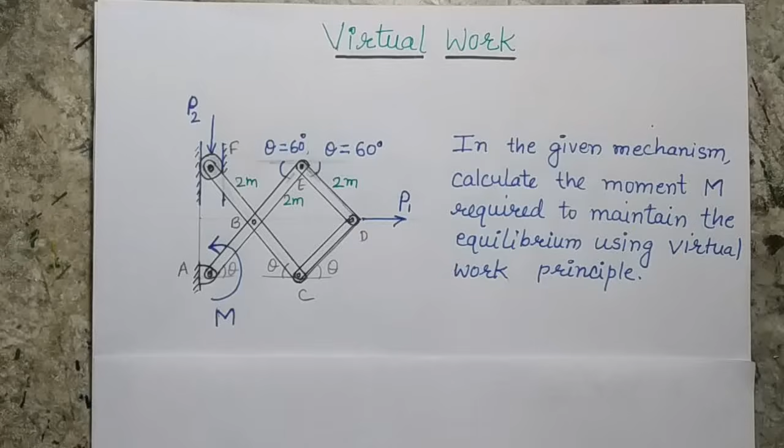This is a problem of virtual work. The problem states that we have to find the value of M for this system, which is in static equilibrium, using the principle of virtual work.

So let's first see the problem. I can identify there are three forces: force P1, force P2, and a moment M which is acting at point A.

I can identify that joint A is a pin joint, however joint F is a roller joint, and all the other points like B, E, D and C are pin joints. In the given condition, the system is in static equilibrium where the angles are 60 degrees and the length of each segment is 2 meters. We have been asked to find the value of M for this system.

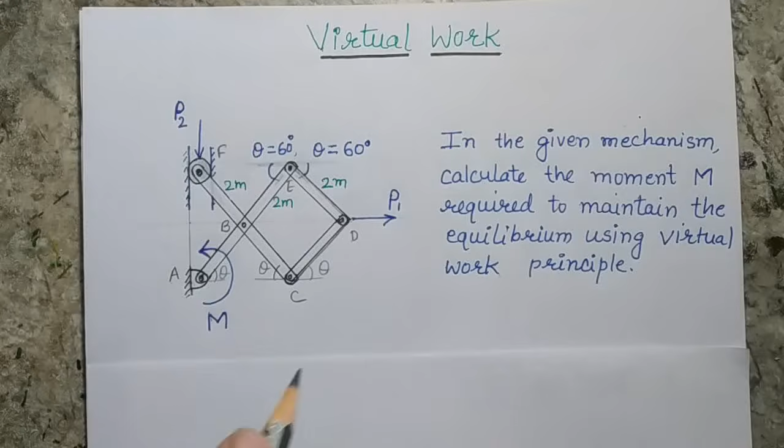However, force values P1 and P2 are also not given. That means we have to find the value of M in terms of these two variables.

Now we know that in the principle of virtual work, we have to displace our system virtually. After the displacement, we should find the displacement of each point where forces are acting, and then write the equation for virtual work. So now let's solve this problem.

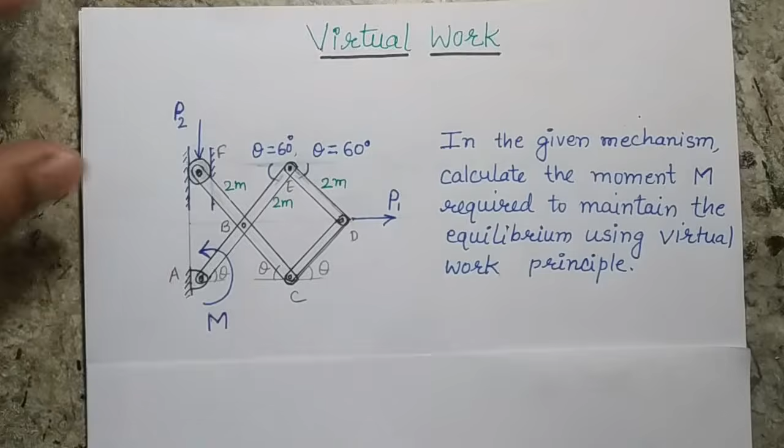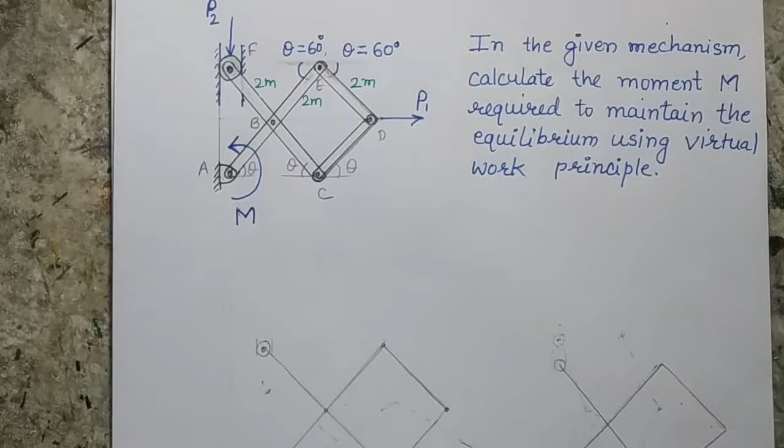My first job would be to give a virtual displacement to our system, and the question arises: what sort of virtual displacement?

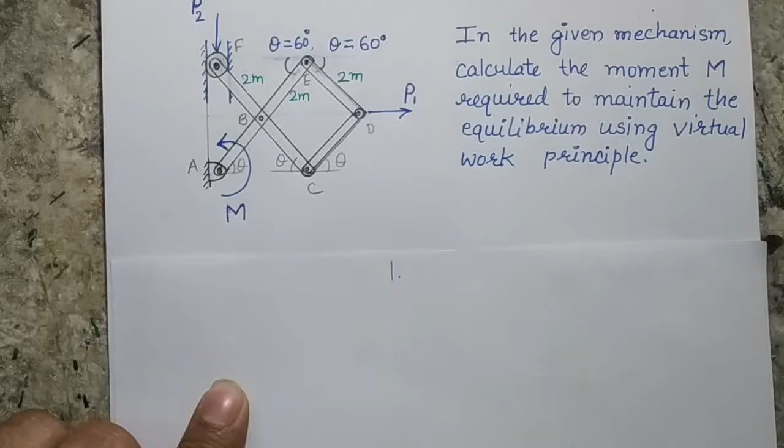Before I solve the problem, let me explain the first condition when we see a problem of virtual work: how your system will move when you give displacement to any section or point of your given mechanism or system.

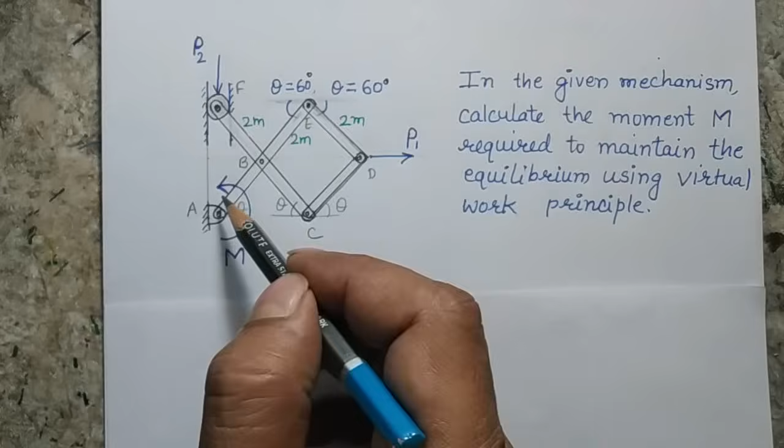For example, in this case, if I give a rotation to this bar A, B and E, maybe in the clockwise direction or counterclockwise direction, I can understand that when there is a rotation to this bar, the other points will get a different position.

However, the position of all the other points can be calculated if I know the rotation of this bar. That means all the motions are connected to each other.

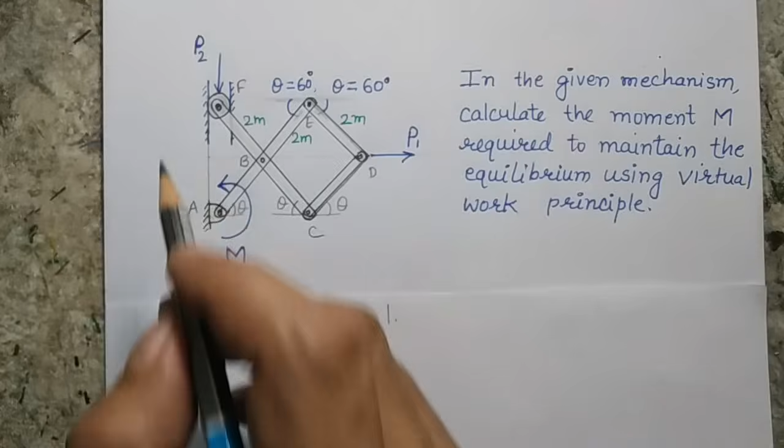On the other end, suppose I am giving a certain displacement to the roller joint - here I am giving a 1 centimeter displacement to this roller in the downward direction. Do you think that if I give this displacement, I will be able to get the position of all the other points?

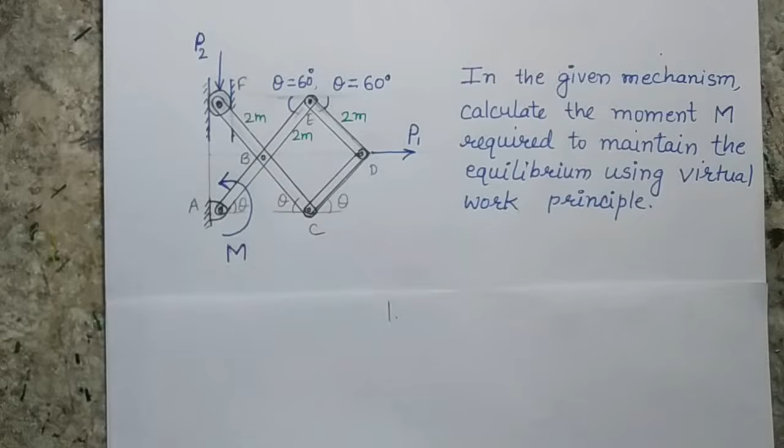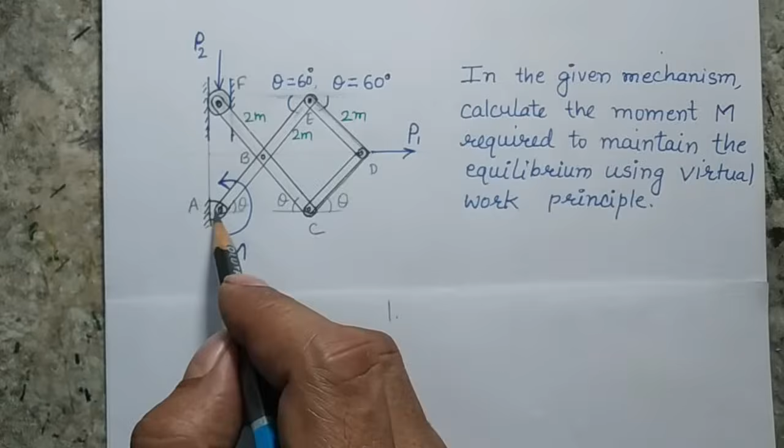Yes. Why? Because the distance is constant between these two points, which cannot change. At the same time, the roller joint can only move in the vertical direction, and joint A is not going anywhere - the rod can only rotate.

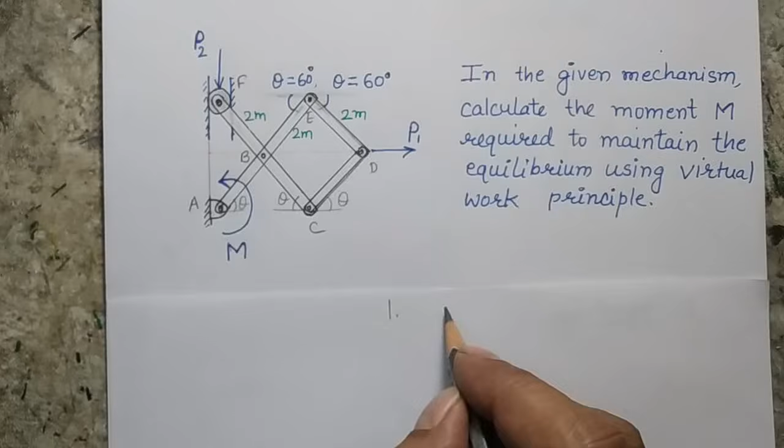That means all the degrees are connected to each other, and the system only has a single degree of freedom. This is a system of 1 degree of freedom. In most cases, or probably in the first year mechanics course, when you study virtual work, most systems are a single degree of freedom system.

Now, after identifying the degree of freedom of your system, your second job is: when you give a virtual displacement, what would be the configuration of your system after the virtual displacement.

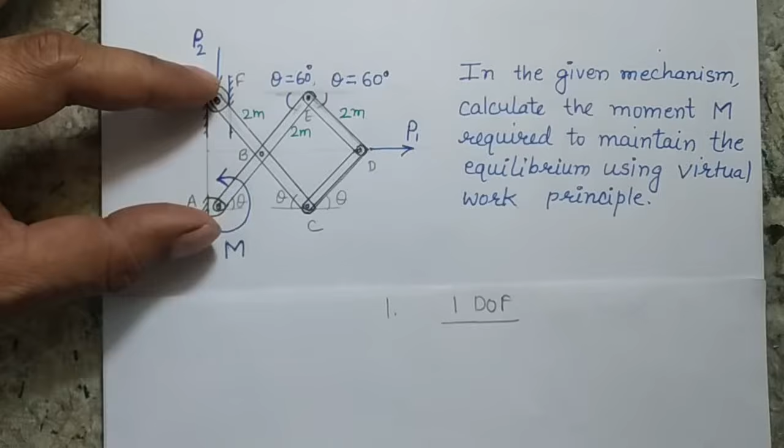For example, this is a scissor kind of mechanism, so I can estimate that if I give motion to this joint - point F inwards - if I give a rotation in this way, point D will go in the forward direction, but at the same time it will also go in the downward direction.

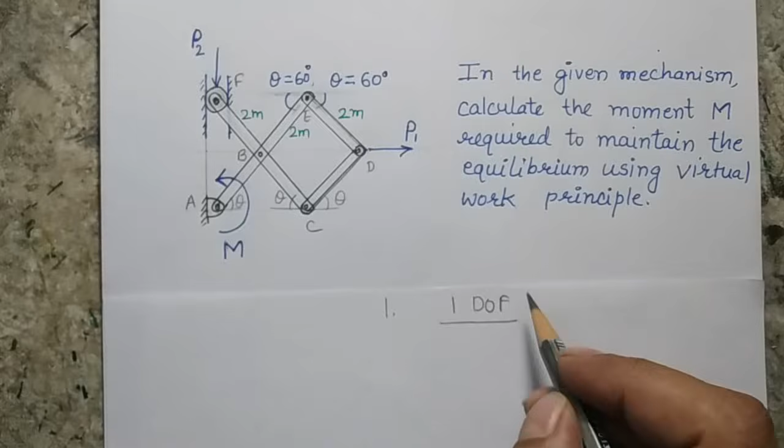That means after getting the degree of freedom, you should have a visualization so that you can see how your system is going to get a new configuration when you give a virtual displacement.

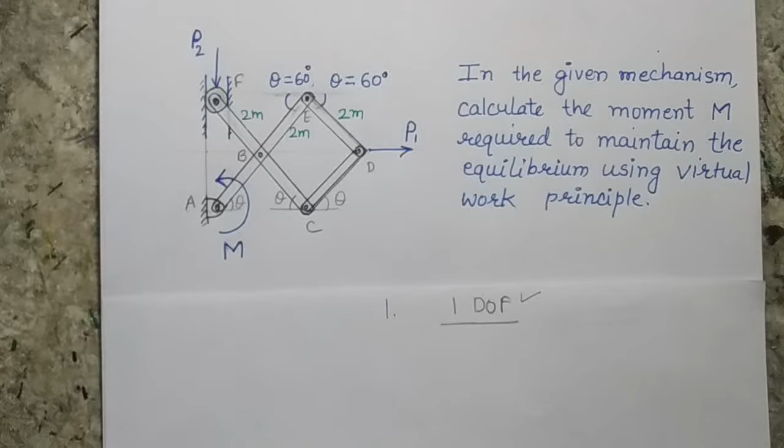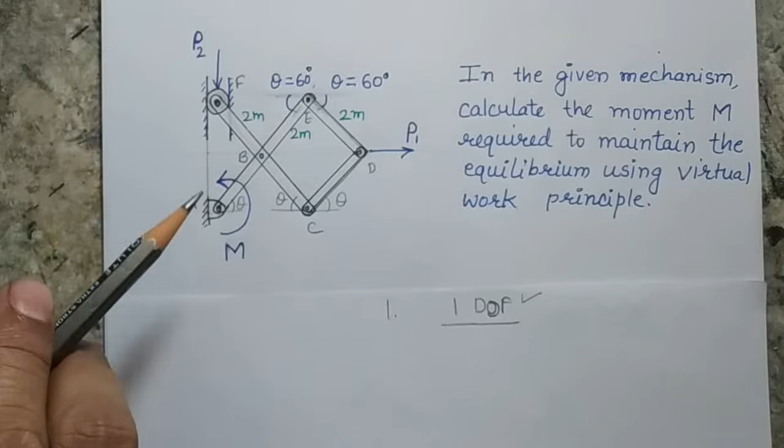The question may be in your mind: virtual displacement to which point? Don't worry, this is a single degree of freedom system. That means if you give a virtual displacement to point F, or a rotation to point A, or motion to point E, C or D, the system is going to get only a single configuration because all other degree of freedoms are connected to each other.

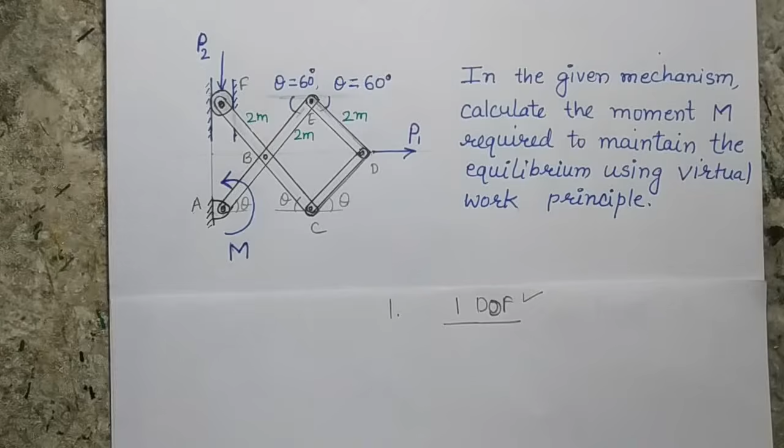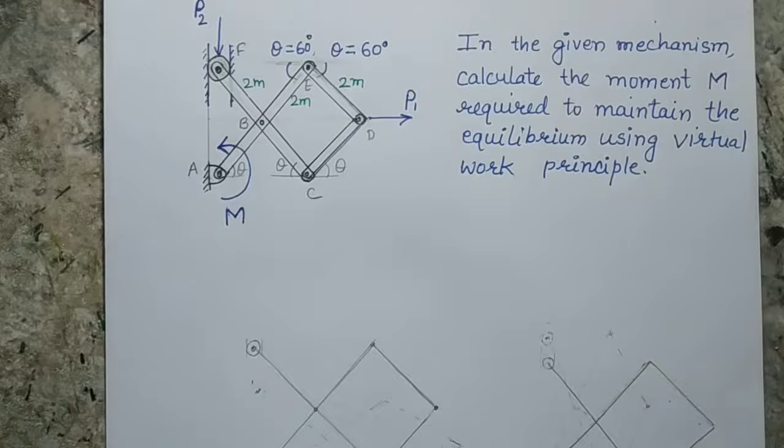So without any delay, I will show you two different types of virtual displacement. Suppose this is my point F, and I want to give a virtual displacement to point F in the downward direction. In this figure you can see this.

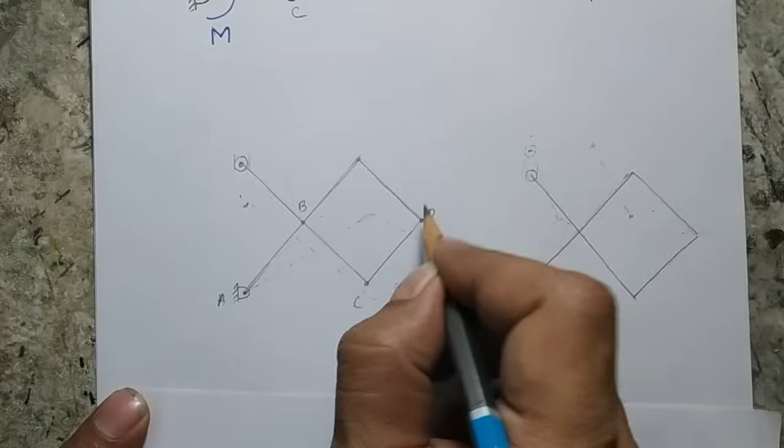This is the picture where positions A, B, C, D, E and F are the initial condition, and I want to give a virtual displacement to this point F, in the downward direction. So this is my delta YF - this is my virtual displacement.

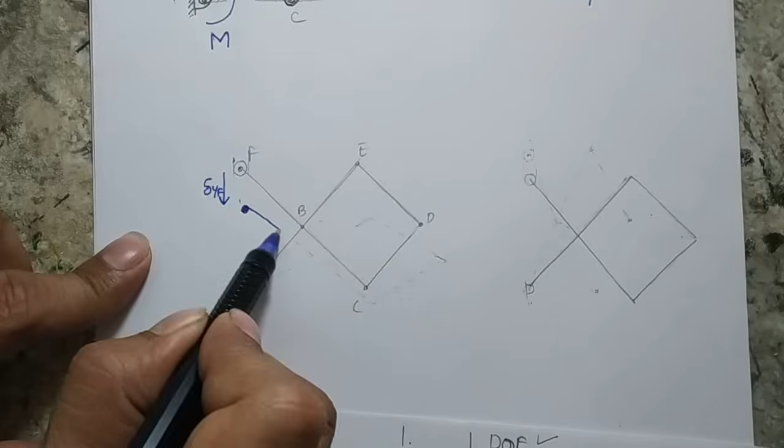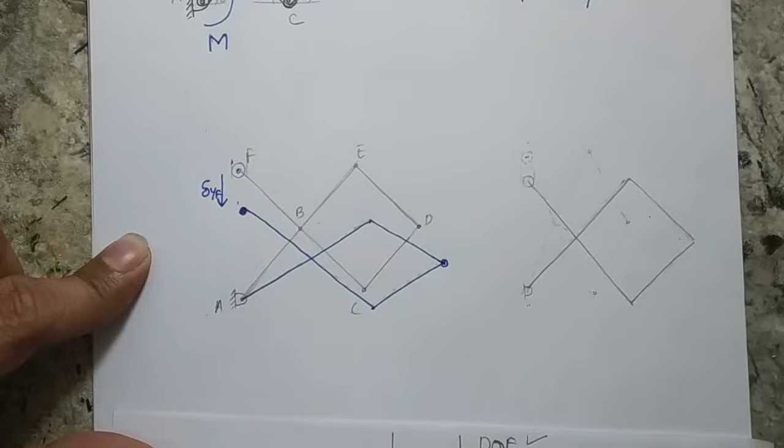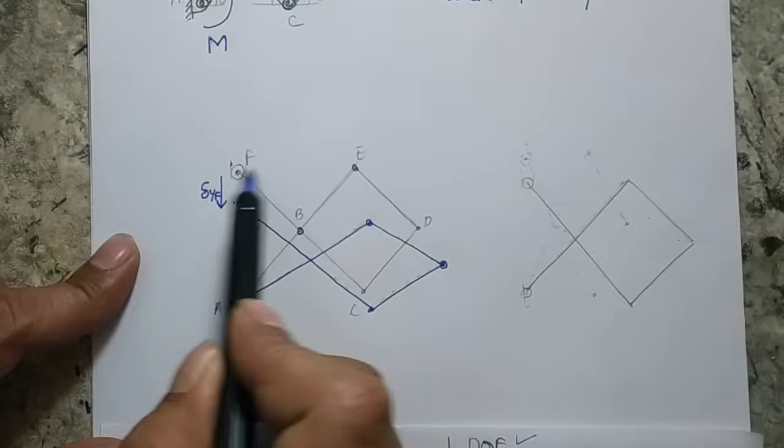As I give the virtual displacement towards the downward side, this point F will come here, and based on this all the other points will get a different configuration. If I try to make the position of all the other points, this would be the final position of my system after the virtual displacement of point F. The virtual displacements are always constrained to your system. That means if you are giving a degree of freedom to point F, you are not allowed to give motion in the horizontal direction, because the roller joint can only slide in this vertical channel. So the virtual displacement of point F will only be in the vertical direction.

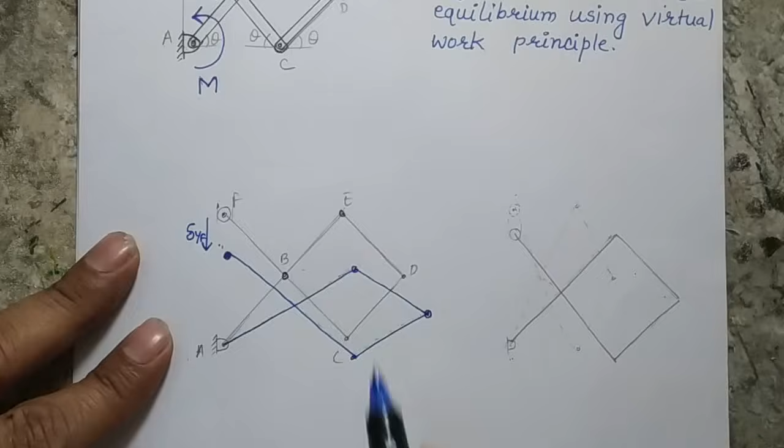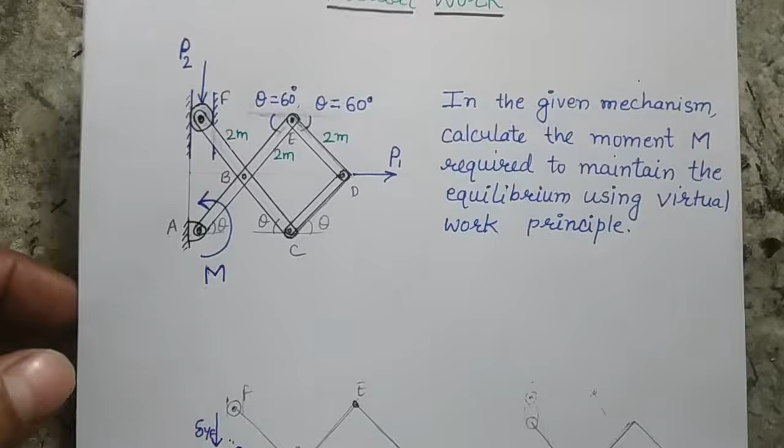So now this is your displaced condition, and you know there are three forces: force P1, force P2, and the moment M. If you want to write the equation of work done, you must first understand the motion of all three points. In case of point F, this is my deflection. Similarly here, this is my rotation del theta of the link. Point D has moved horizontally, suppose this is del X D, and point D has also moved vertically, suppose this is del Y D.

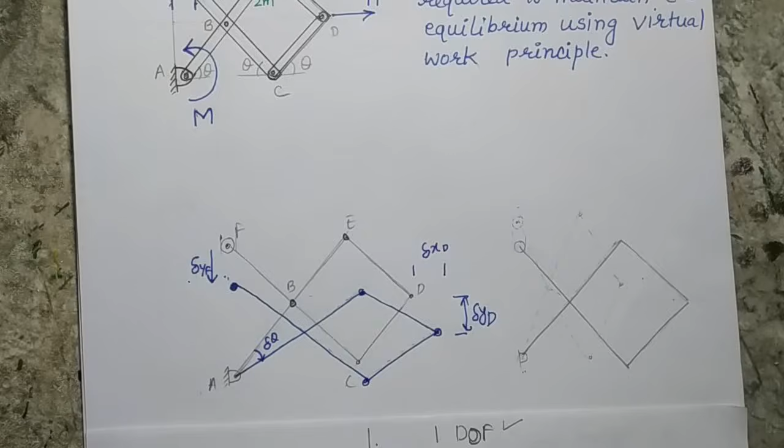Now you should see that point D is having a force in the horizontal direction, this is force P1. Similarly, point F is having a force which is force P2, and the rod has a moment which is moment M. This is one of the configurations achieved when we give virtual displacement to point F in the downward direction.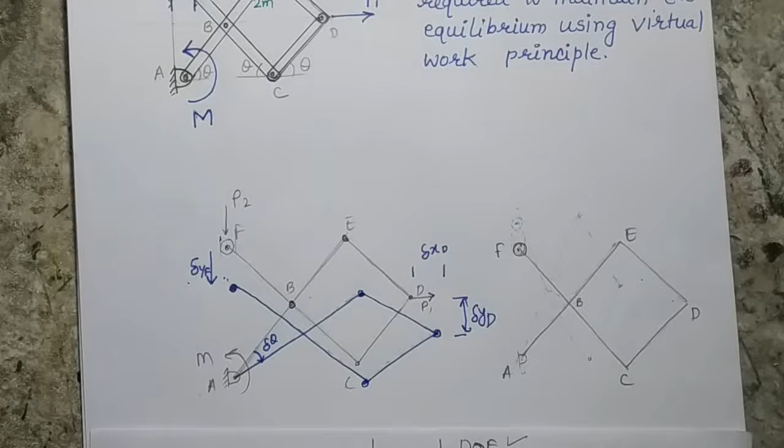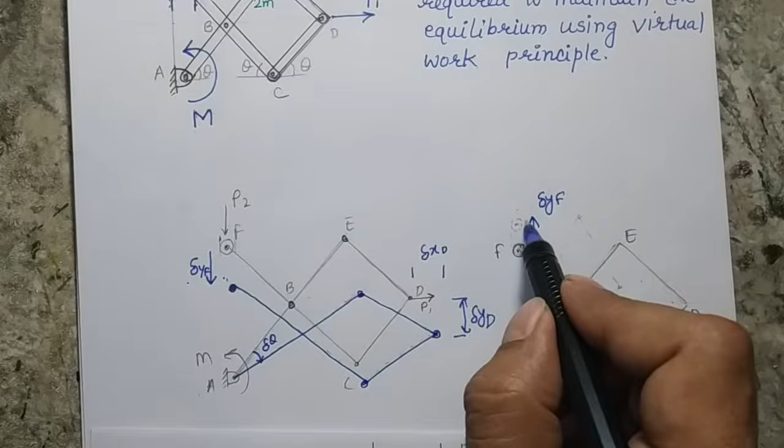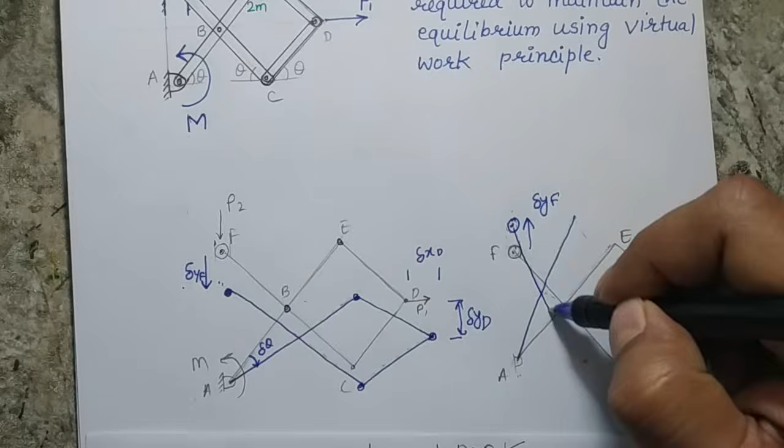On the other end, if I want to give a virtual displacement to the same point, instead of downward direction I want to give a deflection on the upward side. Suppose this is the initial condition for your system: this is point F, this is point A, B, C, D and E. I am giving a virtual displacement to this point in the upward direction, so this is my virtual displacement, written as del Y of point F. This is the new position of point F, and based on this, if I try to make the position of all the other points, this would be my configuration, because you cannot supersede the constraint of your system.

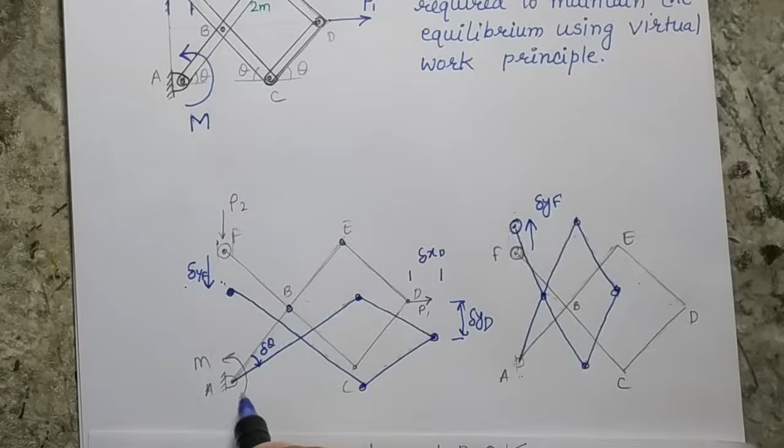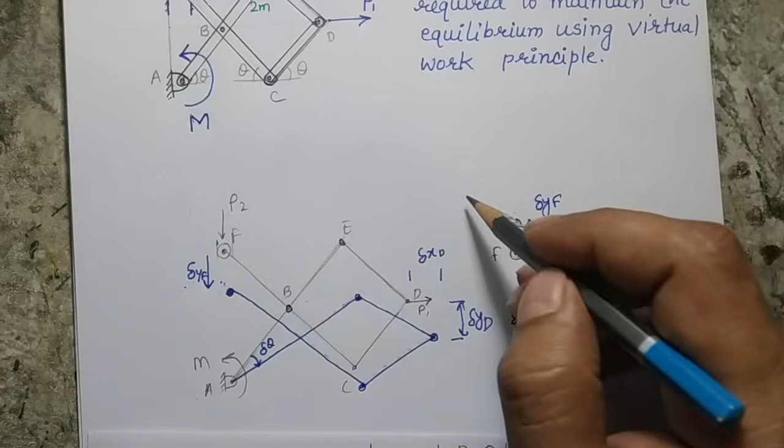You know this is a scissor kind of mechanism, and if you move this point upward, all the other points will get a configuration which is constrained or dependent on each other. In this case, if you see the previous case the rotation was clockwise, but now I have a rotation which is counterclockwise, and this is del theta now. Point D has moved inside with the amount del X D, as well as point D has moved upward which is del Y D. Please understand that you are going to give virtual displacement either this one or that one. For clarity, I am showing these as two different virtual displacements for your system.

After giving the virtual displacement, your next job is to write the equation for the work done. Let's follow this configuration, and now I can see which forces are giving a virtual work. So here this is force P1, this is force P2, and this is the moment M. If I want to consider the reacting force at point A, because it is a pin joint, there will be two reacting forces, but we know that point A is a constrained point. After the virtual displacement, point A is not going anywhere, that means these two reactions are not important and will not contribute in your virtual work equation.

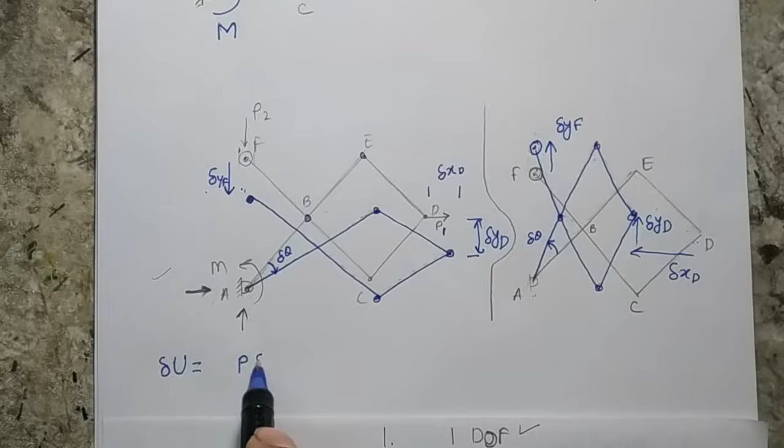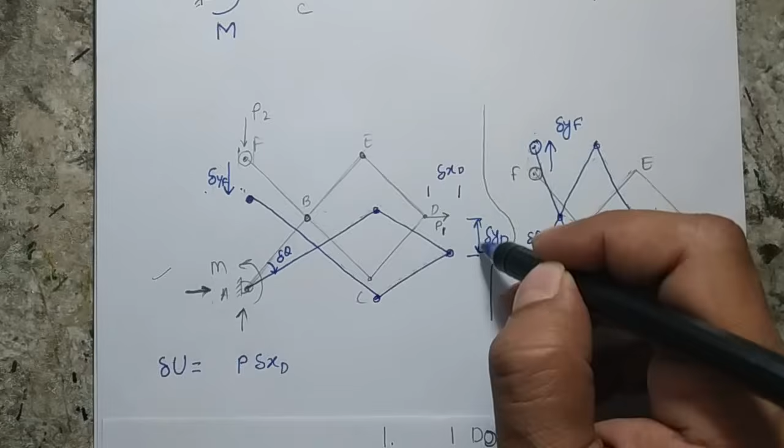So now my next job will be to write the total virtual work. My total virtual work done will be because of the three forces, and I know that P1 having a displacement in the horizontal direction is del X D. If I write the work done in the vertical direction, but I know the force is acting in the horizontal direction, and this virtual downward deflection is just perpendicular to this value, the work done will be 0 because the angle between the deflection and the force is 90 degrees.

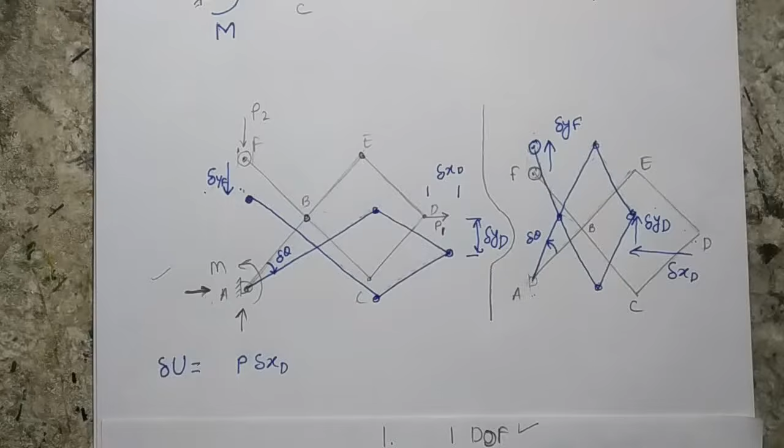However, if I see this one, the work done is basically F dot D, that means the dot product means F D cos theta. Theta is the angle between the acting force and the deflection. Suppose in my case there is a box, I am giving a force F to this box, and because of the force the box is moving in the D direction.

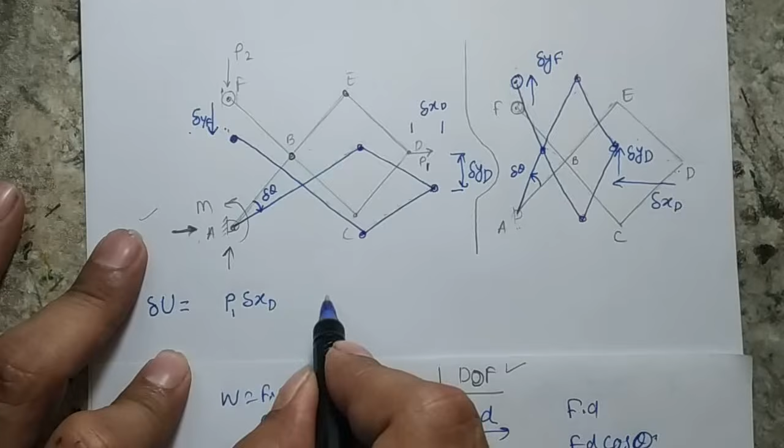That means the force will be F dot D, which is F D cos 0 degree. If I write P dot del X, it will have a cos 0 degree, so I just write P into del X. Similarly, P1 into del YD will be 0, so I am not writing it. The third force will be P2 into del YF.

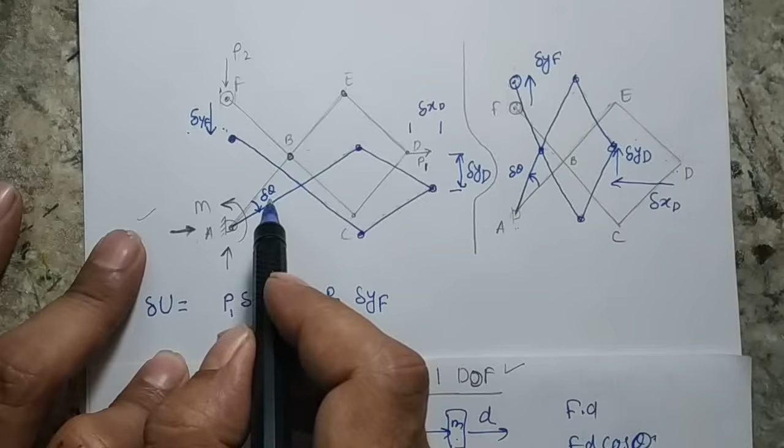The third work done will be the rotational work done because of the moment. The moment M has a virtual displacement del theta, so the work done because of the moment will be M del theta. I have not put any sign here, because after writing these three terms, we can put the sign.

I request all students to follow this step, it will be easier and less erroneous. Your error level will be low, because this is the force P1 and the deflection is del XD. The force is acting towards the right and your virtual deflection is also towards the right side, so this will have a positive sign.

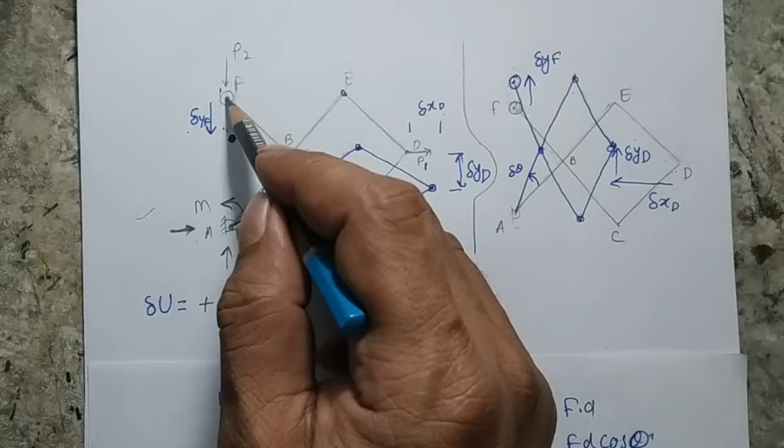The second force P2 has a virtual displacement towards the downward side, so this work done will also be positive. But when you see that the virtual displacement given to this point is in the downward direction, your rod is rotating in the clockwise sense, while the moment M is acting in the counterclockwise direction. That means the direction of the moment and the rotation of the rod are not in the same sense, so this work done will be negative.

Now you may think this virtual displacement is given based on our choice, so why would the sign be positive or negative? Don't worry, if you write the equation for this case, only the direction and sense terms will be common. The only difference will be that the sign of P1 and P2 becomes negative and the sign of M becomes positive. So follow either this free body diagram or this virtual work displacement approach, it will not make any difference, only the sign will differ.

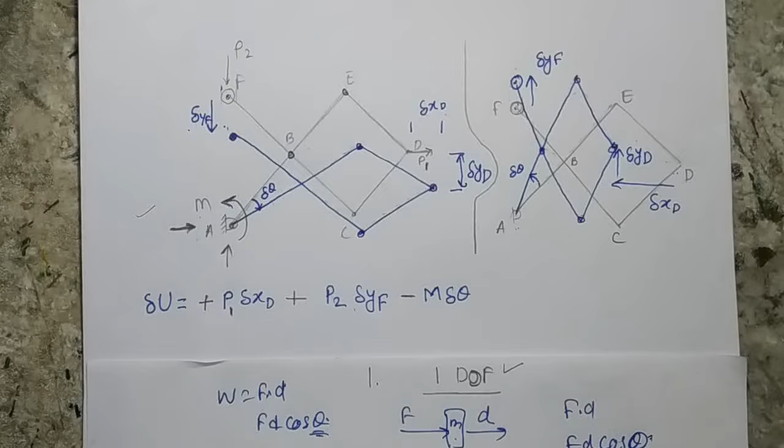After writing the total virtual work done, this total virtual work done is going to be 0, because this is not actual work, this is virtual work. So this is my equation which will give me the unknown value of my moment M.

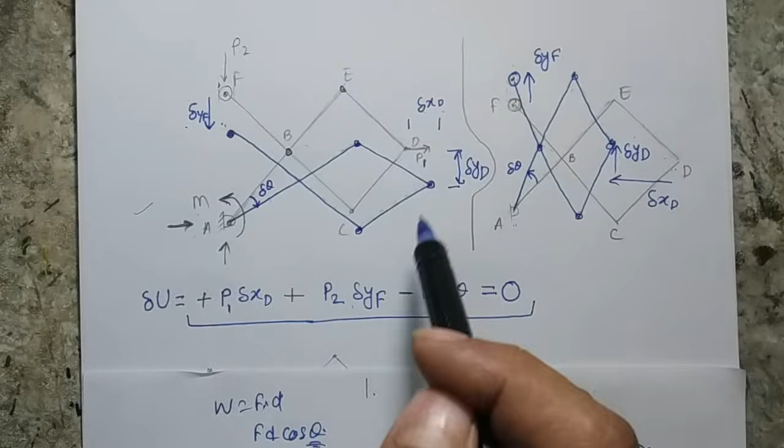Now my next job is that del XD, del YF and del theta are not single values, so I cannot directly solve this problem. As I already said, all the degrees of freedom are connected to each other. If you find del theta, you will be able to get the value of del YF or del XD, because all degrees of freedom are connected, or the geometry of the system is known to you. That means you can replace any of these terms with respect to the other term. So how can we do that?

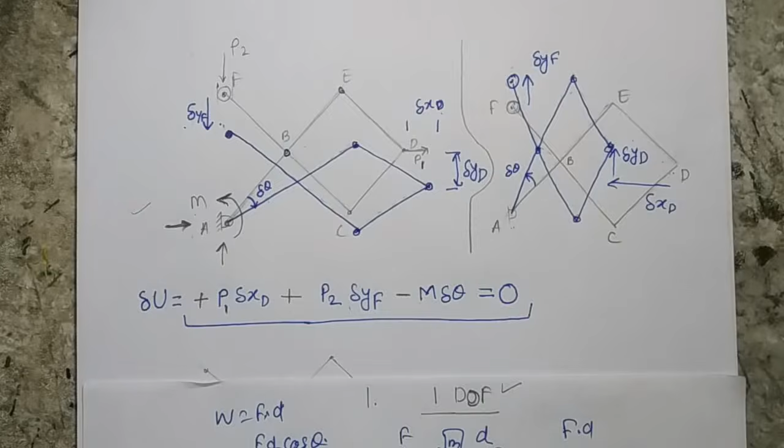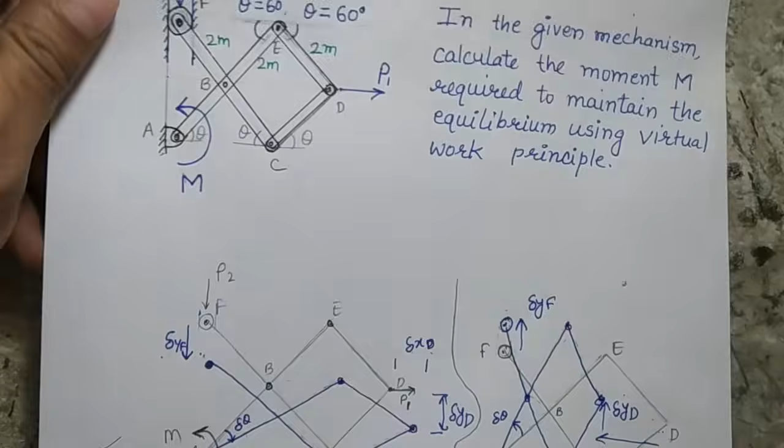This is a very important step to solve the problem, so watch carefully. You are interested to find the deflection of this point, the deflection of this other point, and the rotation of this rod. So we are going to make our original configuration. This is your displaced configuration, this is your original configuration. I am going to make the original configuration again, and you know the length of this section is 2 meter, 2 meter and 2 meter, and all the angles are given as 60 degree.

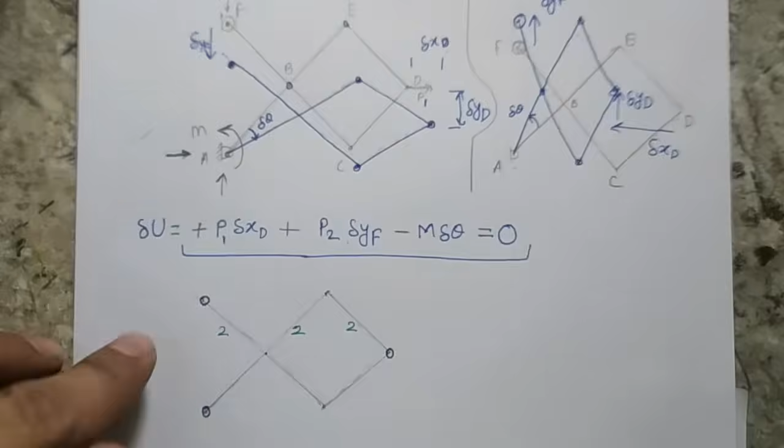Your job is, if you see here, you have perturbed or given a variation or displacement to your system, and you are interested to find the displacement of point D, the displacement of point F, and the rotation of this rod. In the case of virtual work, when you give a virtual work, basically you give a variation to your system.

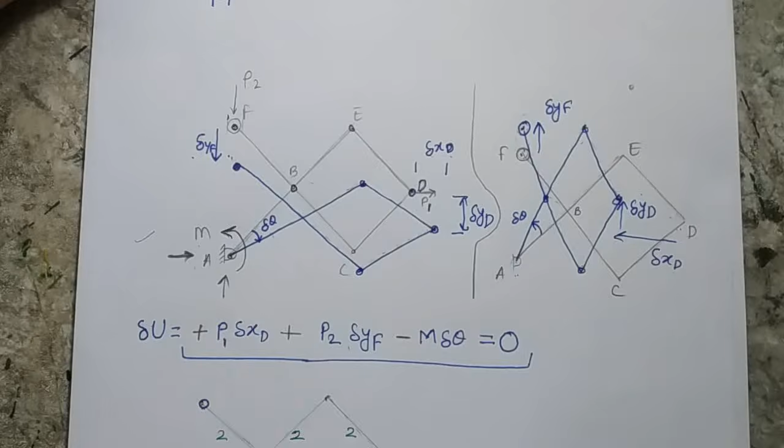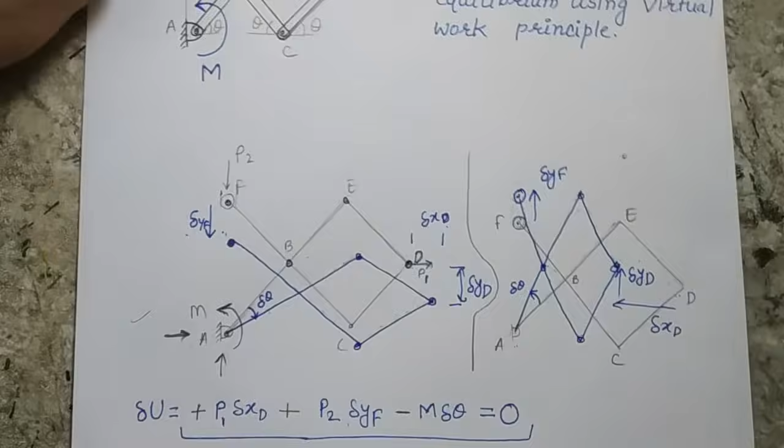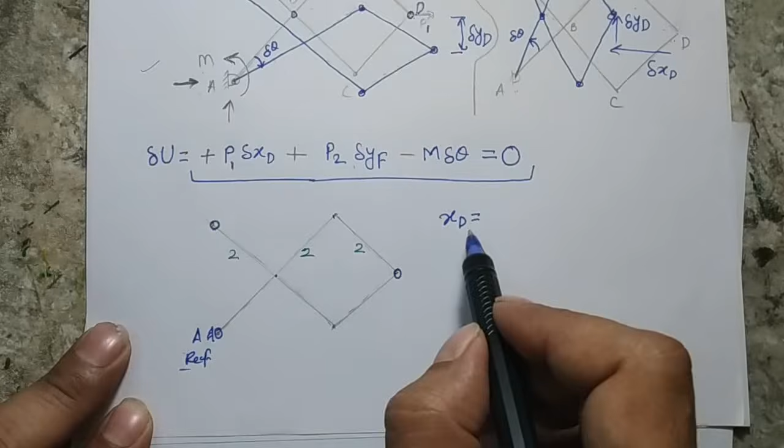If I know the coordinate of my point D, I am giving a variation to the coordinate of point D. That means the change in the coordinate of point D will be the displacement of point D. So I am going to write the coordinate of point D. But first I have to define a reference point, which would always be the fixed point that is not going to change. In this case, A is the fixed point, so A will be my reference point. When writing the coordinate of point D with respect to A, it will basically be theta degree, theta and theta.

So if I write the distance of point D, it is the total distance, which will be the cos component of this part and this part. So it will be basically 2 cos theta, then 2 cos theta, then 2 cos theta. So the coordinate of point D will be basically 6 cos theta.

Similarly, if I want to find the deformation or virtual displacement of this point, I have to write the y coordinate of point F, which will be the sine component of this. So it will be basically 2 sin theta plus 2 sin theta, which is 4 sin theta.

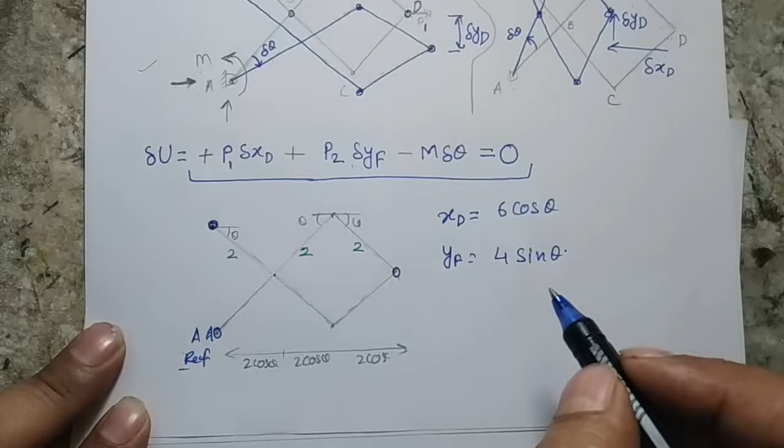Now the third is already in terms of theta, so I am not going to write the coordinate for this. Now my job is to find the value of del xd, meaning I am going to apply this delta. Delta is nothing but the variation to the coordinate of D, and the variation is nothing but the first derivative. So I have to differentiate this term.

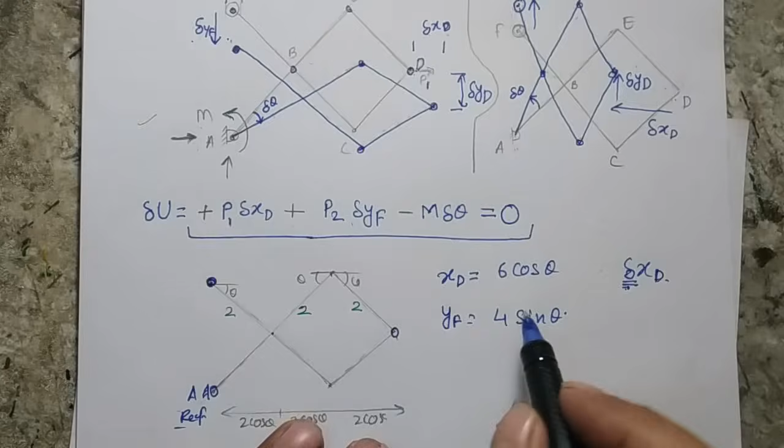So I am going to get that del xd will be 6 sin theta del theta with a negative sign. Similarly, my del yf will be 4 cos theta del theta.

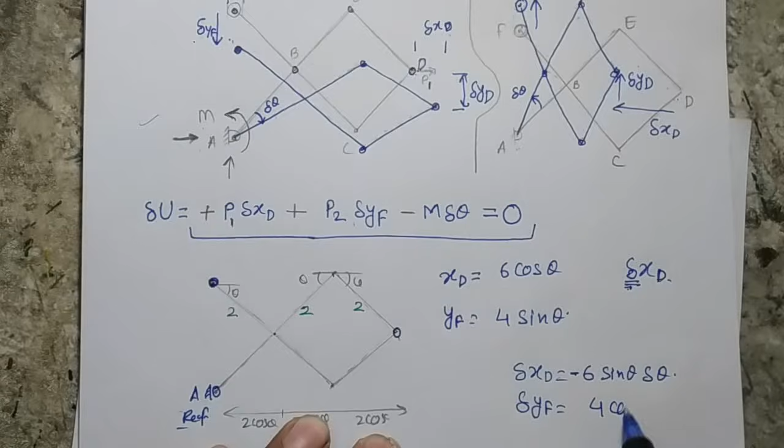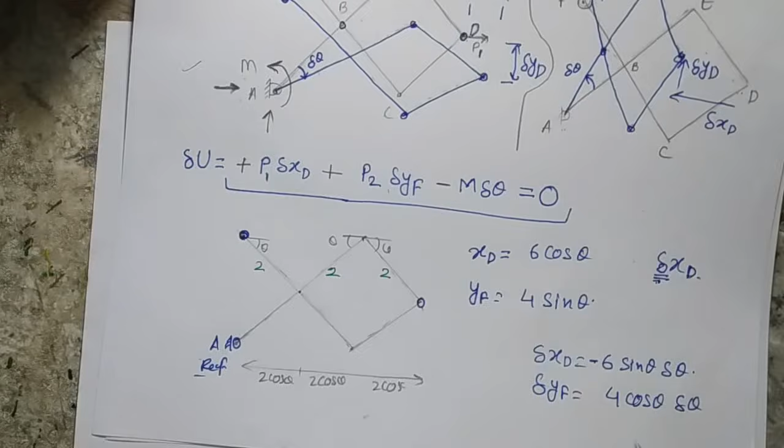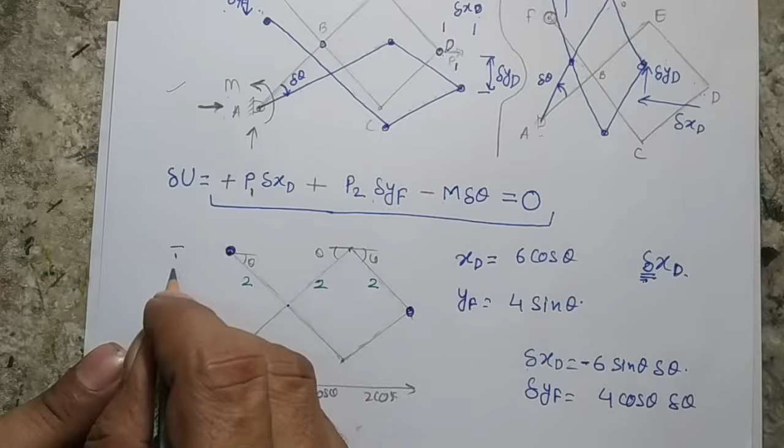Please understand, you can remember this step by step, but I want to give you the detail of how you get these del values. Earlier you had this point and knew the coordinates of these two points. After getting the coordinates, you perturb your system or give a virtual displacement to it, and virtual displacement is so small that it represents a variation in your system, and this del basically represents that variation.

When you see books, sometimes you may find they use this variation term. Variation is basically the change in your coordinate or anything, and that can be calculated by getting the first derivative of the respective coordinate. So in this case, these are the two coordinates and this would be the final value.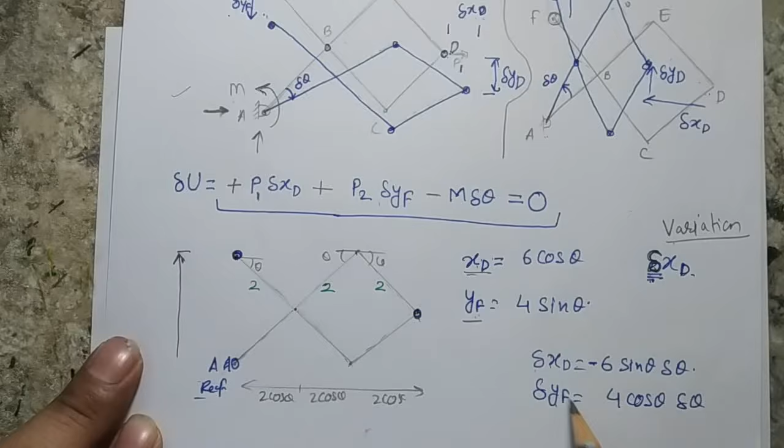When I put this value back into my equation, I will get an expression. That expression will be defined by this term. Here you can see that this is 6 sin theta. Please remember, here again is an important point.

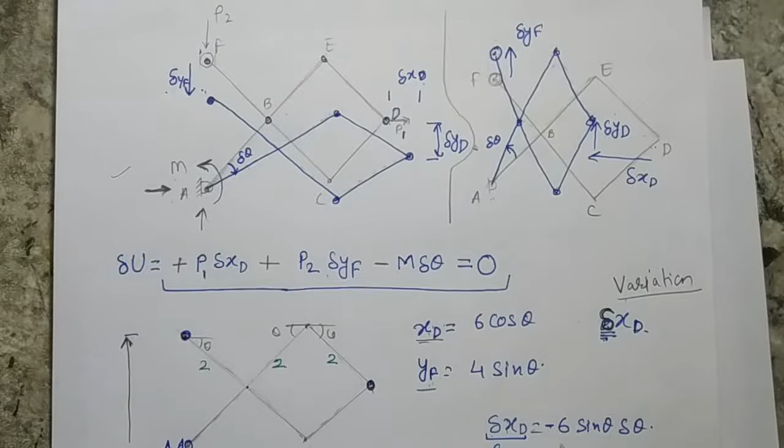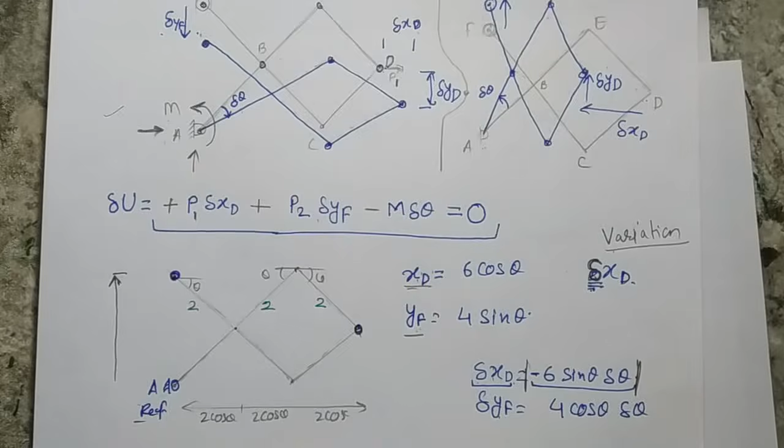If you see that this value is coming out negative, please remember, I am not going to use this negative sign. I am going to use the absolute value of this del x. Why? Because these signs are already defined based on the motion of the point.

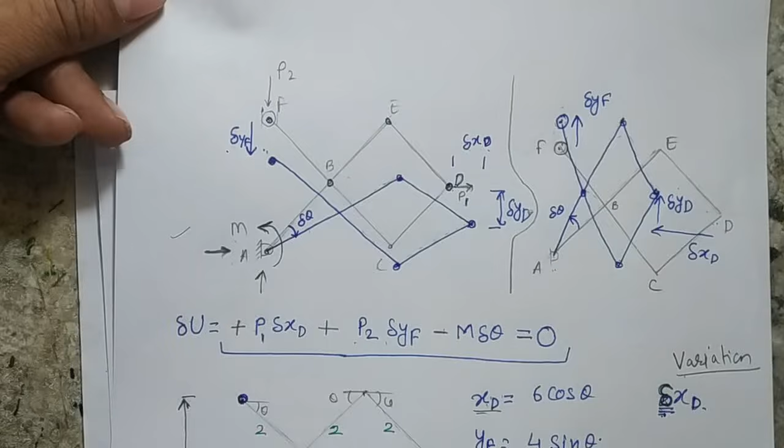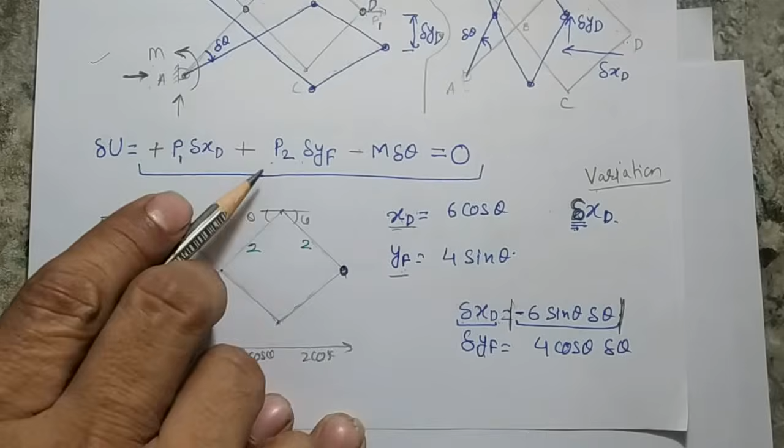As I told you, if you give the sign at this stage, that will help reduce your error, and when you get the variational value or the variation in the coordinate, you need not put the sign again. If you use the same sign here, the term will change again, which we don't want. So once you fix your sign at this stage, after that you are only going to use the absolute value of these two terms.

So when you put back these two values, you are not going to use this negative sign. I am again repeating for all the students, we will get the derivative, but after getting the derivative, we are going to use the absolute value of the variational value.

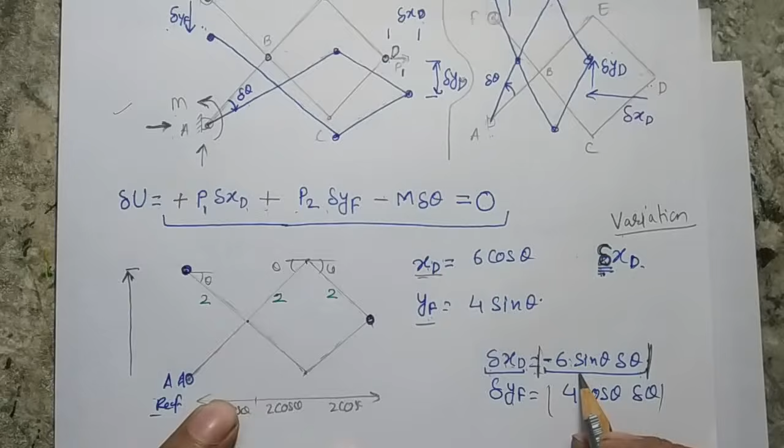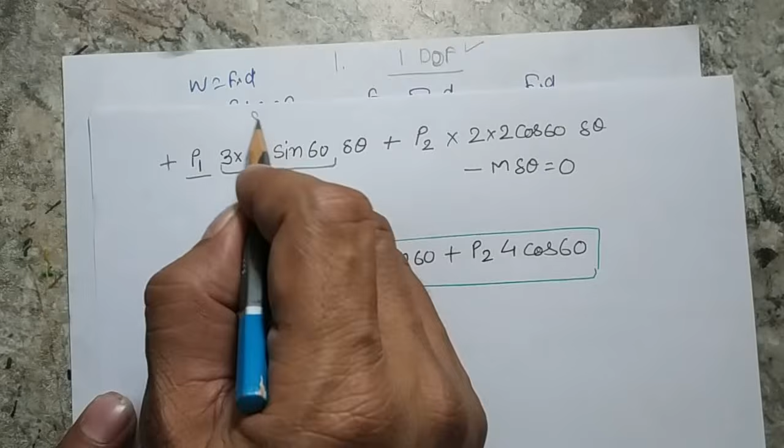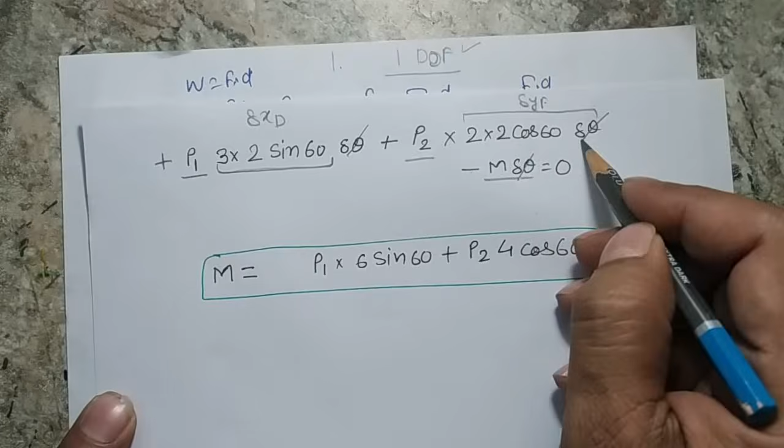So when I put this value back here, this would be my expression, where P1, which was a positive value, is your del xd. Similarly, P2, this value is your del yf, and this is your m del theta. Now you can see that del theta is a common term, so I can remove it, and finally when I rearrange, this will be the value of moment. So in that way we can solve the problem of virtual work.

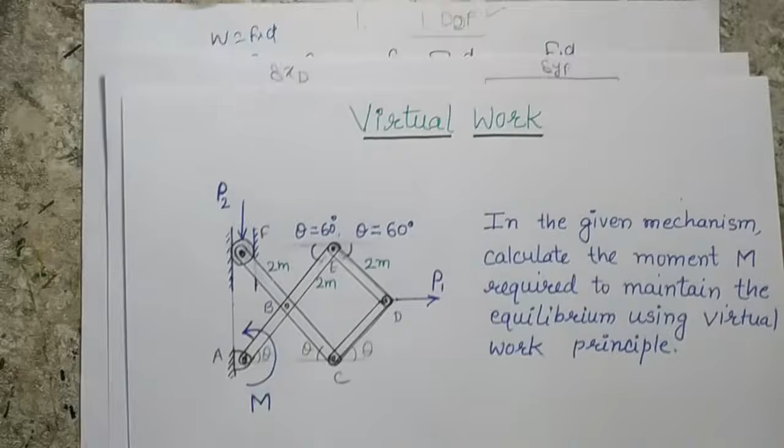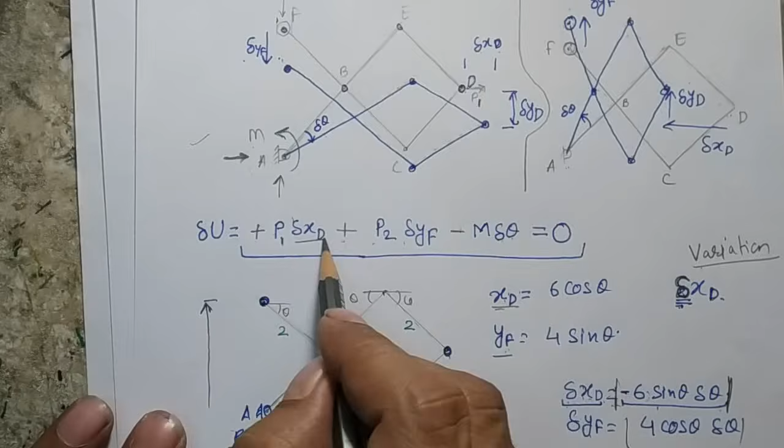So I am just summarizing that this is your actual problem. After giving a virtual displacement to your problem, first you will write the work done equation. After writing the work done equation, you will see the equation. There are 3 terms which are not known to you, but you know that these degrees of freedom are connected to each other. So you will go back to your original configuration, and then you will write the coordinate of your point of interest.

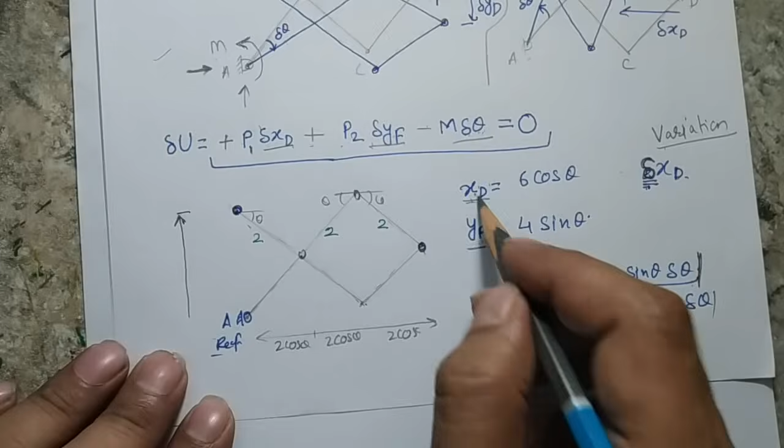I can write the coordinate of these points, but there is no force, so I am not interested. These are the coordinates. After writing the coordinate, you have to give variation. Variation means you have to give the first derivative. You have to find the first derivative. This is my first derivative for this coordinate and first derivative for this coordinate.

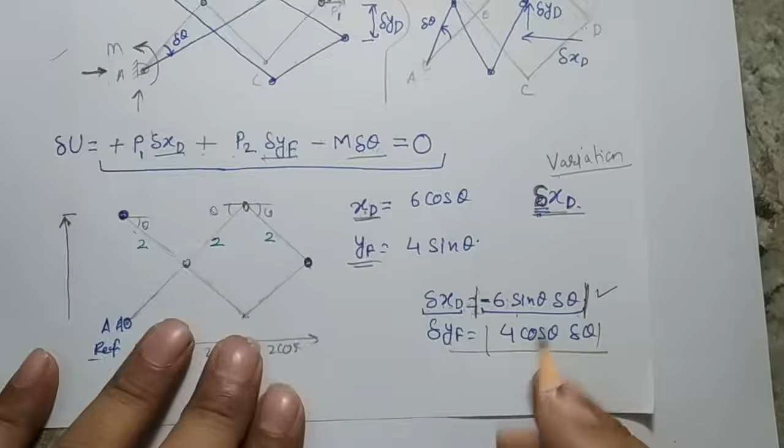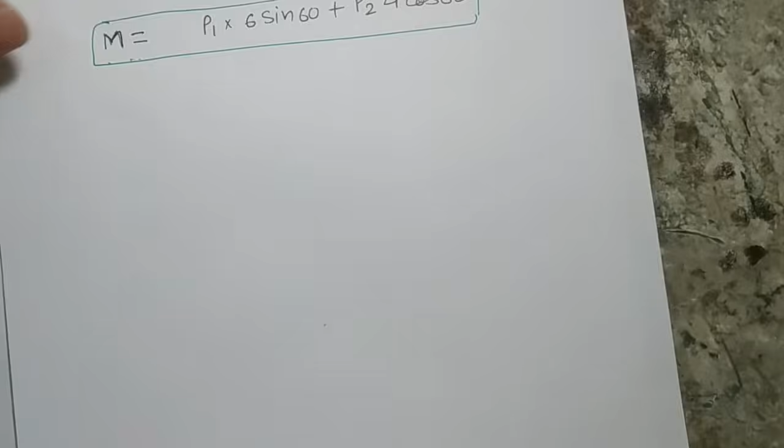However, the negative sign is coming here, but I have already put the sign at this stage when I was writing my work done equation. So I am not going to use this sign. I am just going to use only the absolute value, and after putting the absolute value, I am getting my final answer. So my moment will be this value, which is in terms of these two variables P1 and P2.